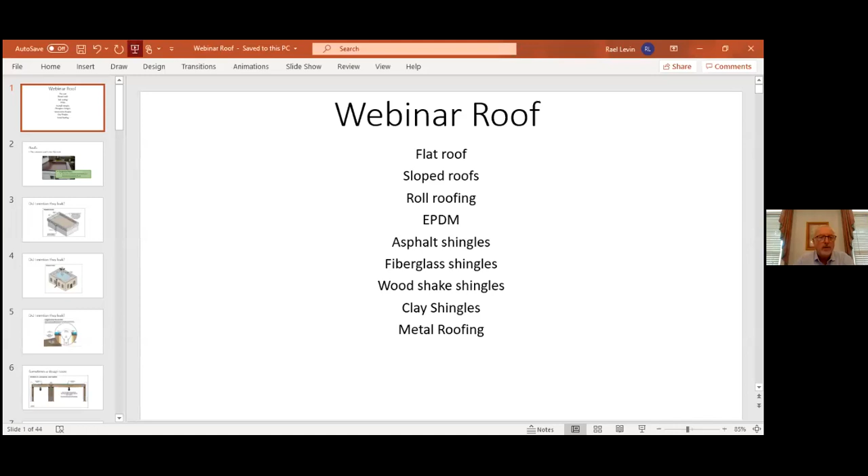Okay, let's share the screen and we'll start off right here. And we are ready to go. So we're going to deal with all the different types of roofs. We'll show photographs of them, the issues that come up with the different products we see on roofs, and we'll discuss actually physically getting on that roof and all those fun things.

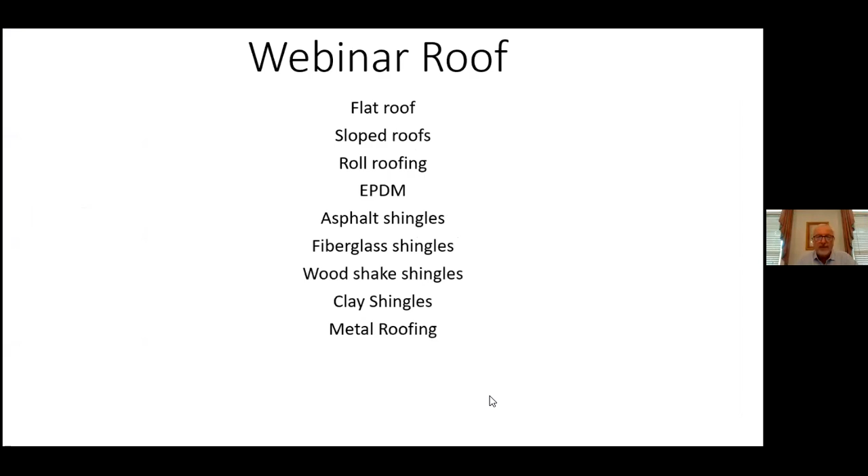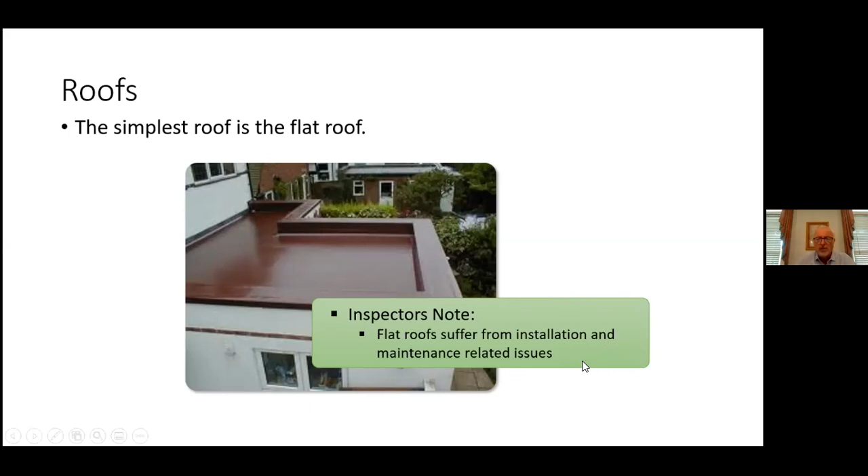Okay, so the simplest roof, of course, is the flat roof. If you see this particular slide, you'll see that we have a flat roof here, and the little built-up wall that goes around it is called a parapet. These are really common down in the Emory area, around Emory University and Grant Park area, but they all do suffer from installation and maintenance related issues.

So here we're looking at, okay, we have a flat roof. This one's got a gravel buildup on it. You can see over here in the bottom there's a downspout, which is actually a scupper. Basically the water would run off the roof down into these gutters here and away from the building. You can see there are others that are slightly above, about 2 inches above the membrane. Just in case something over here got obstructed, there would be a secondary exit point for any water that might be on that roof, so the water would be able to get out of there.

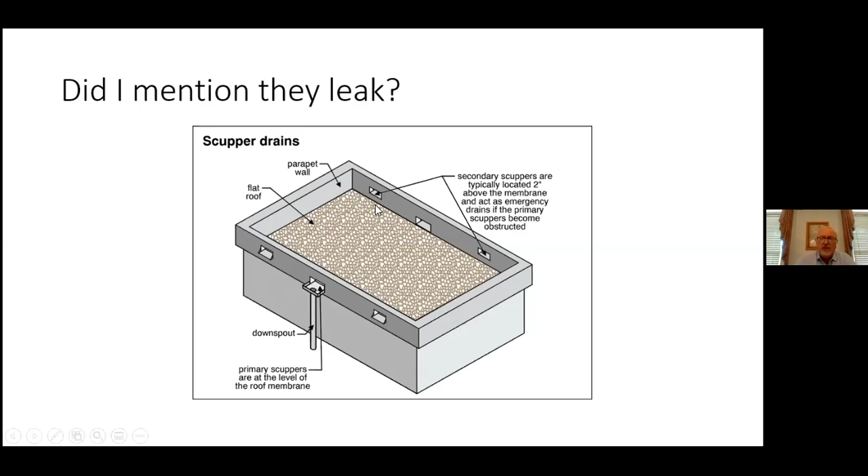And again, as with most things in life and most products, maintenance is a big issue. We're not going to run our motor vehicles without changing the oil or making sure the tires are in good shape. It's the same thing with our home, except we tend to think, well, it's big, it's there, we're coming home, we're busy, we got dinner to make, places to go, errands to run, and therefore the home kind of suffers from a lack of maintenance. Typically here on a flat roof, if you're anywhere near areas with a lot of trees, the leaves and debris that come off the trees would tend to land on this roof and clog up the gutters, and therefore you could have a situation where you'd have a leak.

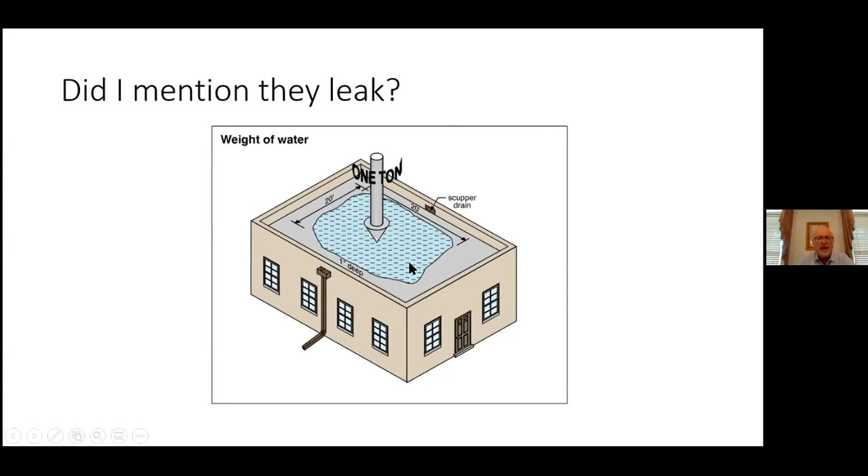So let's look at an example here. Say you're a 20-foot by 20-foot square building here, so that's 400 square feet. With 1 inch deep of water accumulated on there, we're actually looking at 1 ton of weight sitting on top of that building. The building structure, for the most part, over all the years has been wood, and with all this weight sitting on top of the home, when you have that weight sitting there, the wood would tend to give, and we would have a situation of some settling on the top of the roof.

So here we're looking at the clogged drain that has the debris, as you can see right here, and the water is ponding on each side. Because it's ponding, it's causing that weight to put extra stress on the structure.

If you've ever seen the older homes, there wasn't a requirement until maybe 15 or 20 years ago that said the maximum amount of roof shingle you can put on is 1 layer. We'll see a slide of that in a moment, but imagine the structure in the roof back in the old days was a 2x4, a 4-inch piece of lumber that went from the ridge of the home all the way to the outside wall. The actual rafters were placed approximately 2 feet apart.

On top of that, instead of the plywood or wafer board we use today, they had planks, maybe 6, 8, 10, or even 12 inches wide, and 3/4 inches thick. Those in themselves were pretty heavy for the sheathing. On top of that would come the asphalt shingle.

If somebody had a leak, they would just put a second roof on top of the first without taking the first roof off. That put even more weight on the structure, which caused the actual rafters to bow in and sag, and we could see that.

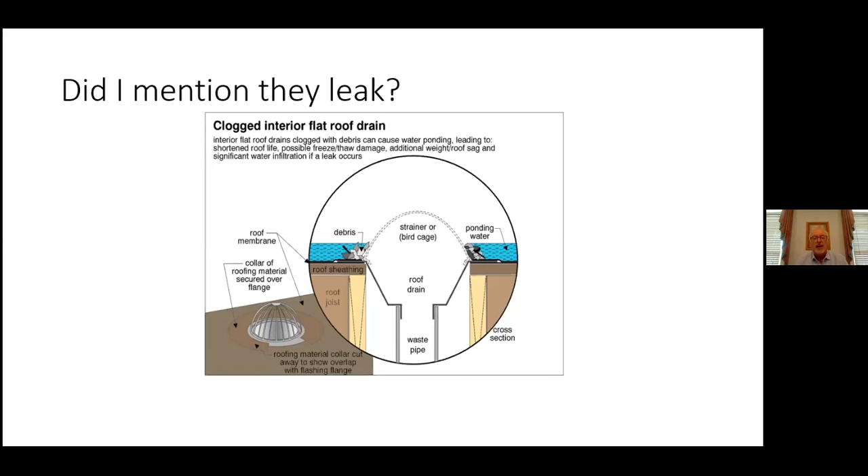So you can see right here how the water has been ponding and it's pushing down on the roof joists. As they sag, more water ponds, so it's an ongoing thing. As more water ponds, the roof joists keep sagging and sagging, so the water wouldn't even run over to the roof drain here anymore.

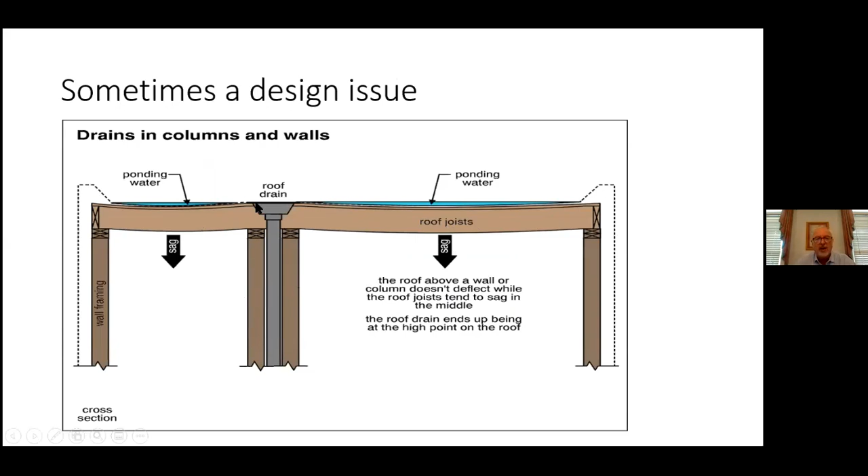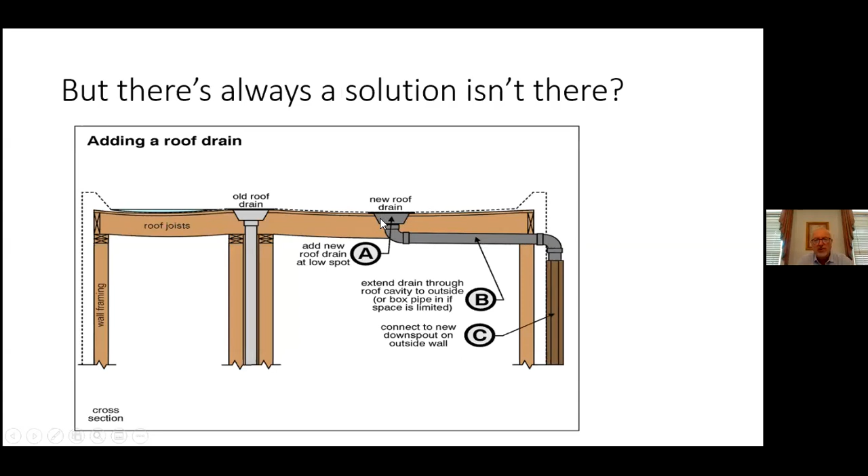So how would we handle this? Well, we would go ahead and put in a new roof drain, one on each side perhaps, and it would go down below here and out through the side wall and down to a new downspout on the exterior. That would be a fairly inexpensive way of dealing with the issue of that sagging rafter on a flat roof.

Okay, so the simplest roofs we see are shed roofs. As long as they've got a pretty good slope on them, we're okay putting just 3-tab shingles on them. If it's a lower slope, then we want to put in something like roll roofing or an EPDM, which we'll cover in a moment.

Usually it was not going to be made out of asphalt shingle, it would have been metal. It's a great show to watch, Building Off the Grid, so by all means check that out.

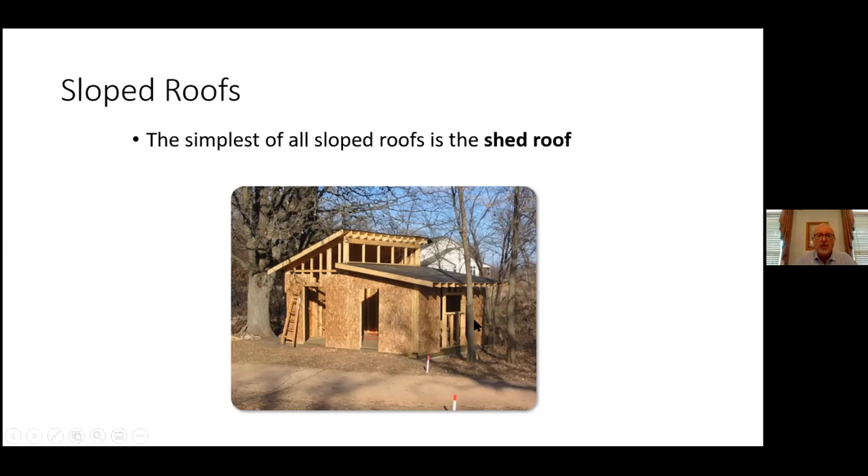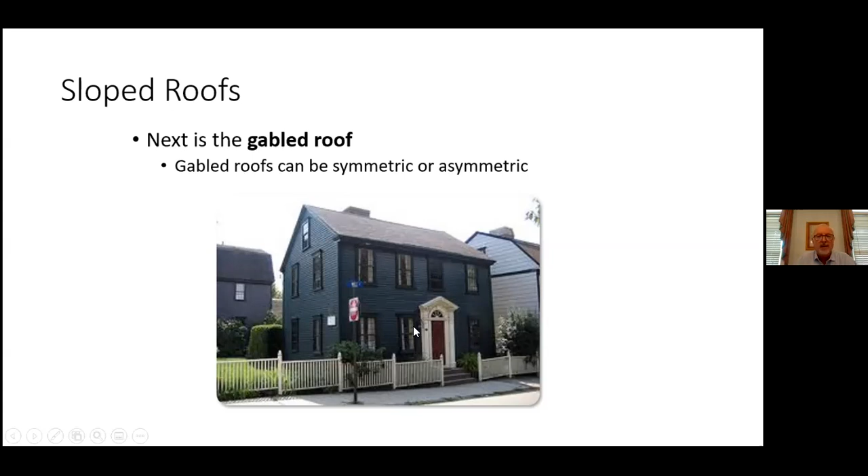So we're looking at the gabled roof, and they can be symmetric or asymmetric. This is just a typical gabled roof right here. It's really, really common that we see gabled roofs in our area.

The issue we would have with that is with water collecting around the base of the home, there would likely be some water intrusion to your crawl space or into your basement at some point.

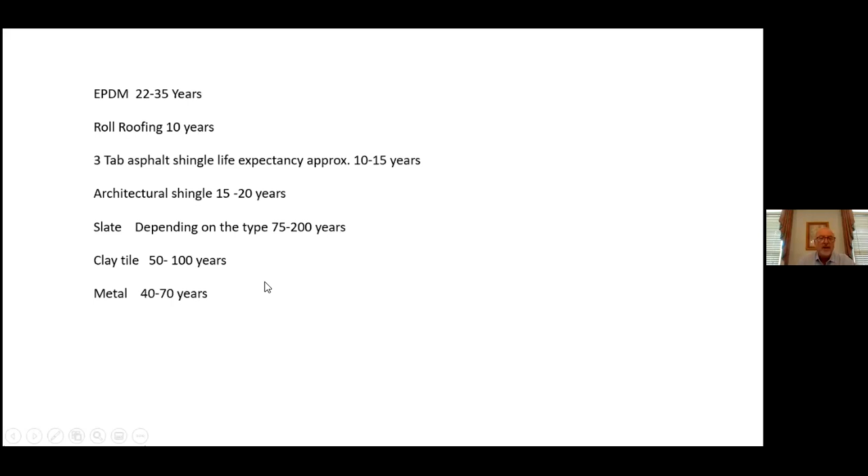So EPDM is actually a durable synthetic rubber roofing membrane. Here's what EPDM stands for: ethylene propylene diene terpolymer. So I prefer EPDM. It's used widely on low slope roofs around our area, really right throughout the United States. You can see it goes up the sides of this particular parapet. We're on top of a commercial building here, and that's the way it's done. It all again depends on installation.

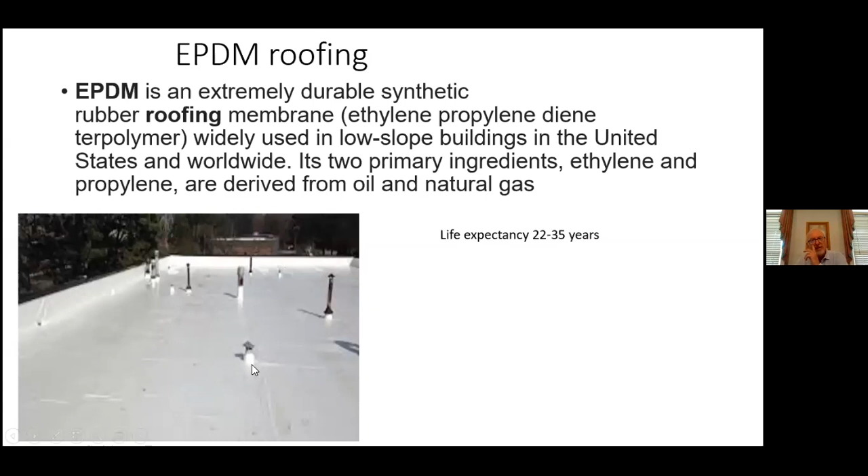We can also get into the modified bitumen roof. This is pretty much like what we would call roll roofing. You can see the seams may be mopped or torched, and they're overlapped about 3 inches approximately over the preceding layer laid out there. They're never installed in a straight line where the seam is; they always need to be staggered to prevent water from getting in. It's a very simple product for handy people to install, but if it's not installed right, it can be a major issue. The biggest thing about this installation is making sure the edges are properly sealed down. When they don't lay flat and correctly, there will be air bubbles, which would provide access for water to accumulate on top of the roof.

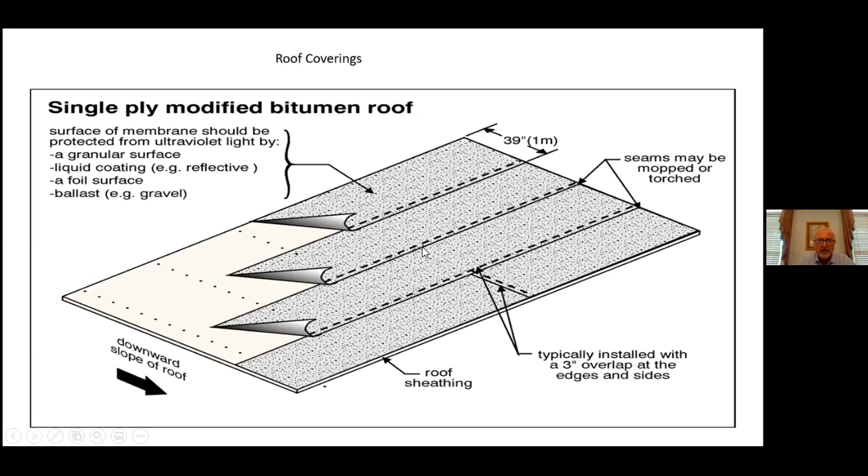So here we can see how it's laid out, it just rolls and rolls and rolls. You can come in and put down roofing adhesive and then roll down the roll roofing on top of it. Or the preferred method is to actually heat it up with a torch, and you can see how this all gets sticky. The asphalt right here would start to get heated up and sticky itself. It's rolled out and seals itself down, and that's the preferred method.

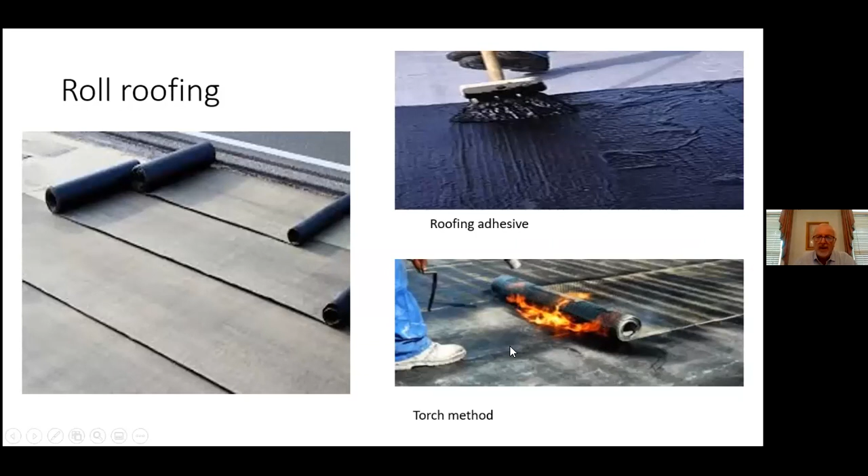Then we have the standard asphalt shingle. Here's the composition right there. It's got a self-sealing strip, a couple of inches wide, and then a granule surface. We've got the actual asphalt body or coating, and the fiberglass mat or organic felt at the very bottom. When you install these, you want to make sure these gaps are not immediately in line with each other; they always need to be offset. So the next shingle would have its opening strips right in the center here, and then it would overlap that far so the shingles could actually self-seal down.

So usually in the winter, it takes a while to get done, but the sun does warm it up enough so that it'll self-seal down. During the summertime, it's a lot easier and quicker for the shingles to actually seal themselves down.

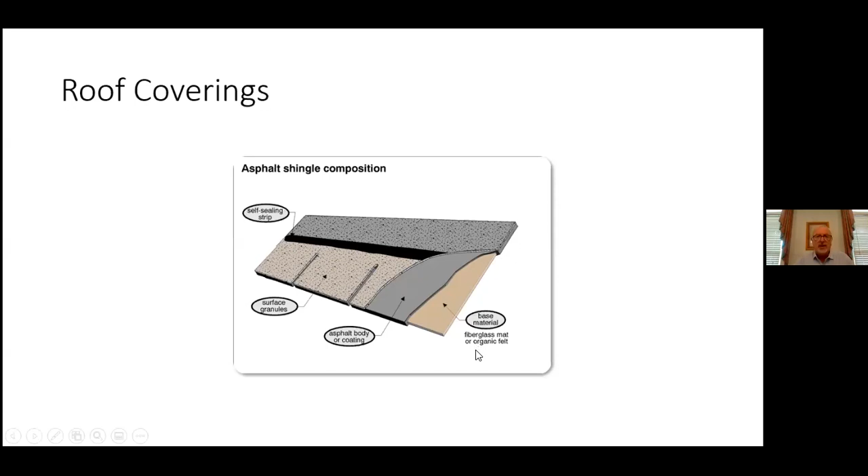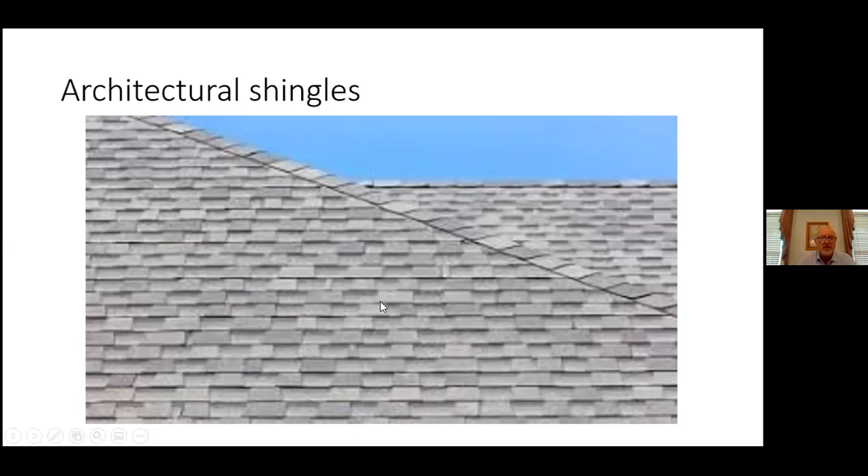So we look at an architectural shingle. For the most part, architectural shingle was a nicer look, and certainly would be on perhaps a more expensive home, but not always. In this particular case, I kind of like to see right over here, we have a ridge vent, which allows the heat to escape from the attic space out through the top, instead of all those wind vents and electrical power vents that Georgia Power would charge you to take the heat out of your attic.

It was just basically a defective product, and they kind of got ahead of the class action lawsuits that came against LP siding earlier on in construction, and also polybutylene piping was another one. These guys got out ahead of it and realized they had a poor product, and they jumped out ahead and said, well, okay, we'll go ahead and replace the shingles for you.

But what the small type says was, yeah, they will provide the material, not necessarily the labor. And as we all know, when it comes to most items that involve construction, the labor is the more expensive part of the process. So removal of all the shingles and hauling them away to the dump and the reapplication of the shingles was where all the money was.

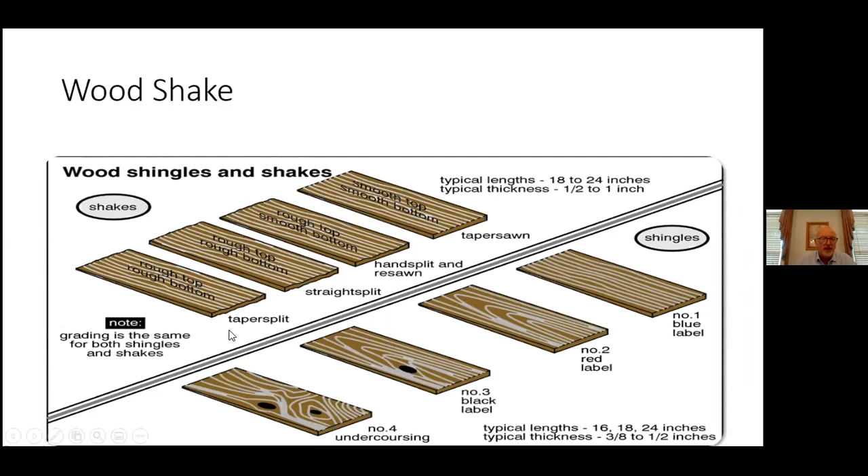Okay, so let's look at our wood shake shingles. Again, depending on the thickness, that would depend on their life expectancy. So we see here different types of actual wood shingles.

The issue here is that this is a product that you couldn't really walk on when you inspect a roof. They're brittle, and many times they've been on there for several years. It takes a special kind of construction in the attic, with the support of the rafters and the sheathing, in order to install these slate tile roofs.

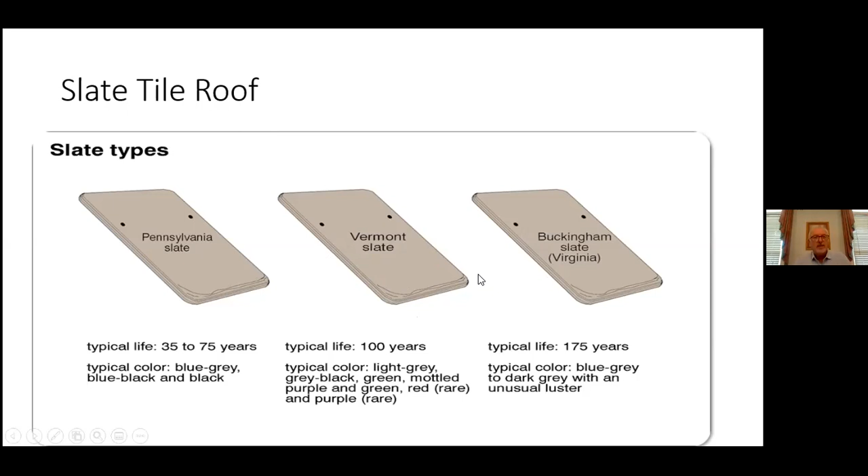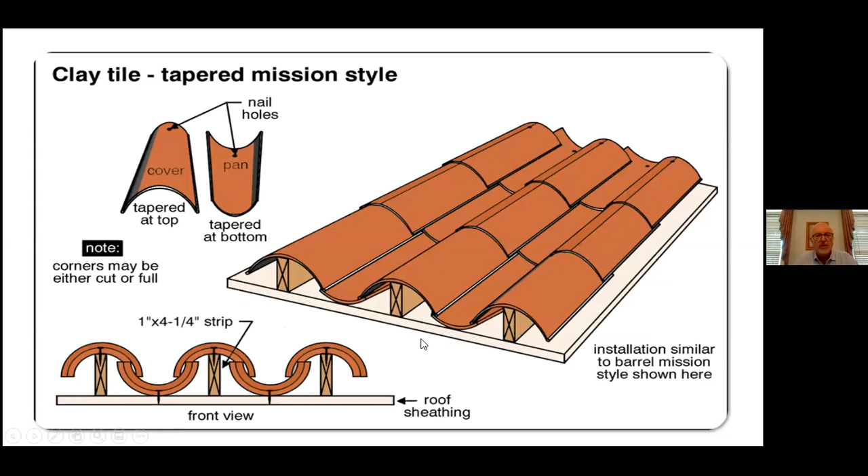And we also deal with the same thing of being brittle and cannot be walked on with clay tile. Wonderful product, looks terrific, but again, cannot be accessed without special scaffolding, which is beyond the scope of what we would do as home inspectors. We will do our inspections according to ASHI standards, which we'll cover in a moment.

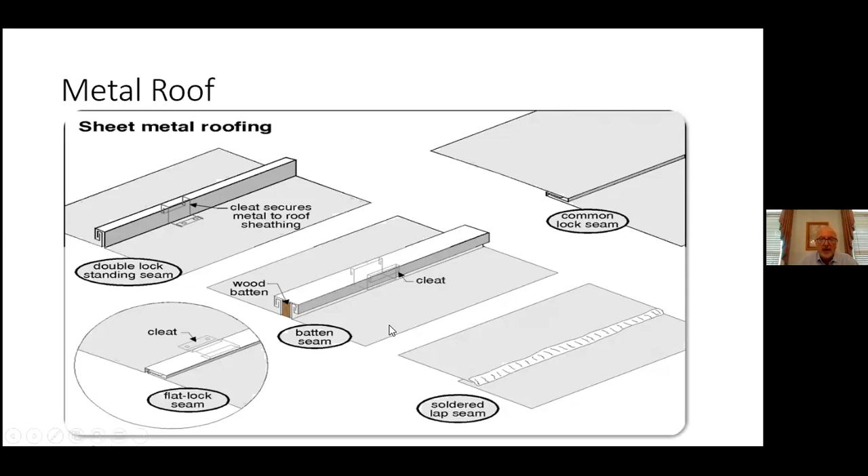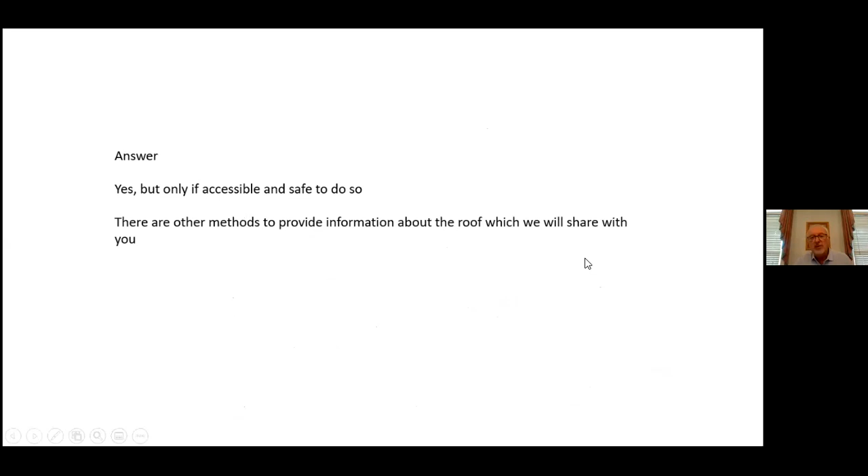So here we go. Do we actually get on the roof? Well, only if it's accessible and safe to do so. And there are other methods to provide information about the roof, which we'll share with you now. So would you walk on the wood shingle, slate, or clay roof? Most times not without special equipment, simply because it's too brittle or slippery.

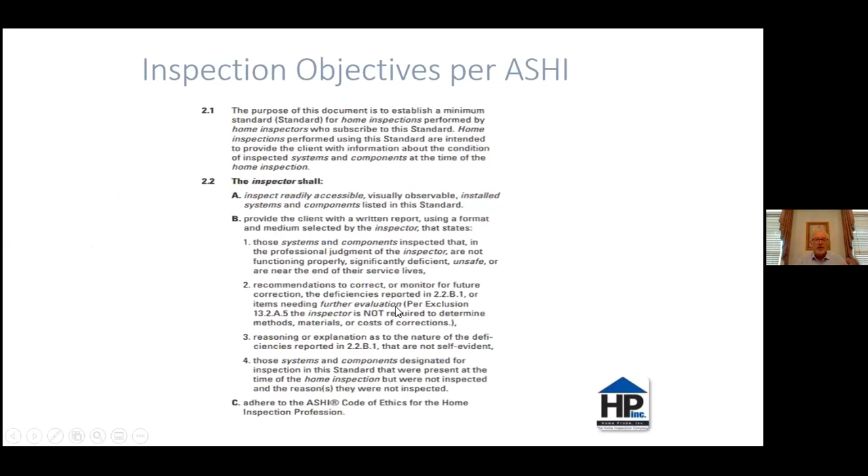So we do our inspections to the American Society of Home Inspector Standards. And here we are having a look at what we are supposed to do. You can see the inspector shall inspect readily accessible, visually observable, installed systems and components listed in the standards. And then we'll provide the written report and describe how we inspected it and things like that.

So if the roof was not able to be accessed safely, there would be a limitation comment in there. The limitation would say the roof is too steep to safely access. Doing so may also cause damage to roofing materials without specialized equipment. The roof covering can be evaluated as a whole, and leaks would be evident from the interior space, and this area is scrutinized when the roof is not accessible. So that's the limitation that we would have there.

We've actually been able to go about a different method as well, which we'll cover in just a moment. So here we would describe how we looked at the roof with binoculars from the ground and from the roof edge if our ladder was able to reach up to that height.

So here we are. We're not required to be there, but here we have our Home Probe inspector. He's on that roof. We climbed up on the side here where this little structure was and were able to get up to here, and then perhaps slide ourselves up to the top of this one right here. So when we can, we will, but it's actually not required through the standards.

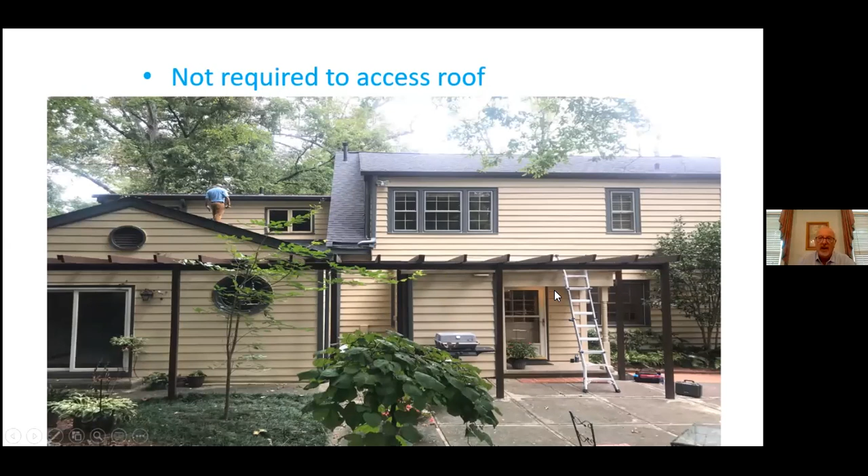So how would we look at the roof and tell you about our issues if we weren't able to walk it? We'd go inside the attic, and we would see where there had been a leak. This was in a home that had a disclosure that said there were no roof leaks, but they obviously had known about it. They had actually put up a little catchment pan here in the attic to catch the water.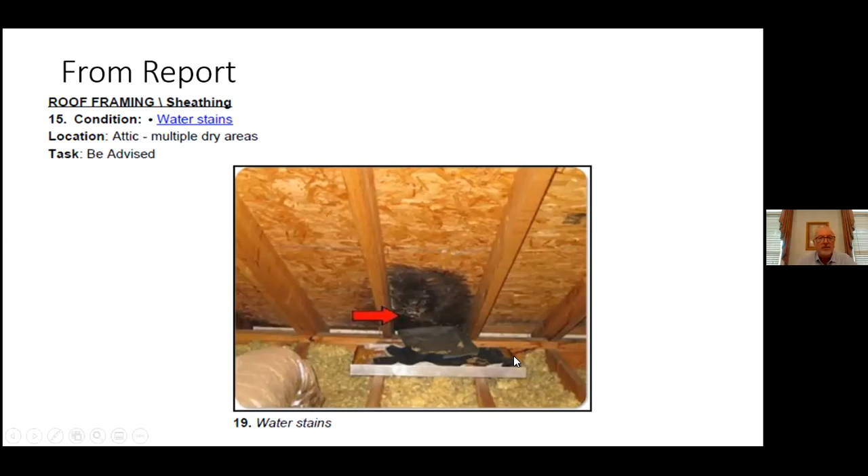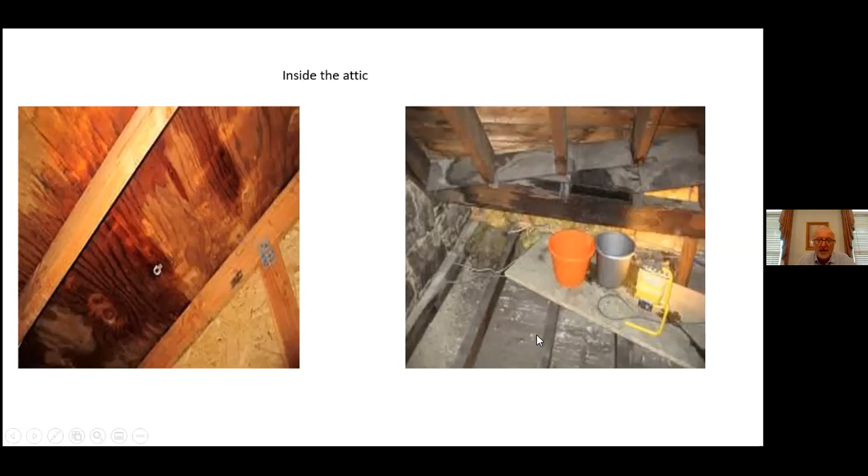So perhaps it wasn't exactly a truthful disclosure. Best to say you didn't know. Inside the attic, again, you can see here the darkened spots where it's wet, and they even had a couple of buckets right here to catch that water on this particular roof. We would see water stains inside from roof leaks.

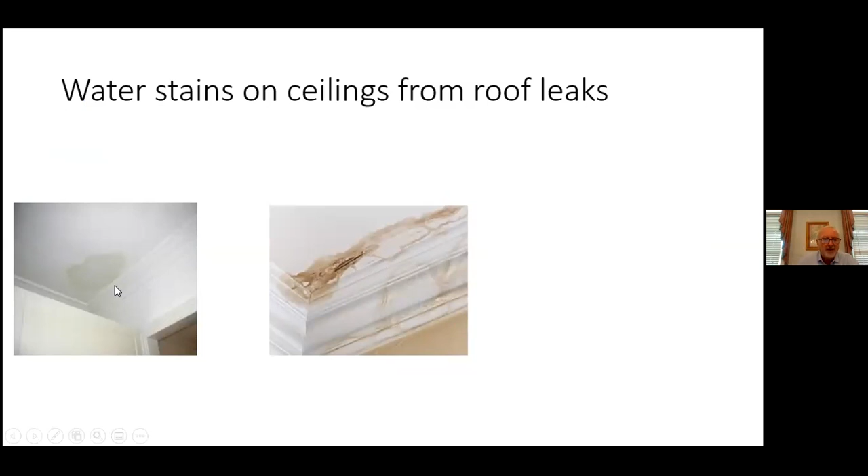By the way, there are different types of testing machines that we have now that can actually tell if the roof leak is still active, and we can put that into the report.

So here we are, we have drones. Every home inspector with Home Probe has their own drone, and this is the way that we will always be able to guarantee you an image from above the roof. These help out tremendously on these really steep roofs, or the roofs that have the type of materials we can't walk on. It's kind of a fun thing at Home Probe.

Everybody was actually able to name their drone. I happened to choose Ethan, because I figured if it was mission impossible for me to get on the roof, I could send good old Ethan up there and we would be able to take pictures as needed. So this is where we would be able to tell the shingle had lost its granules and therefore was at the end, or very close to the end, of its life expectancy. And then perhaps there would be a renegotiation with the budget on how to approach that particular issue.

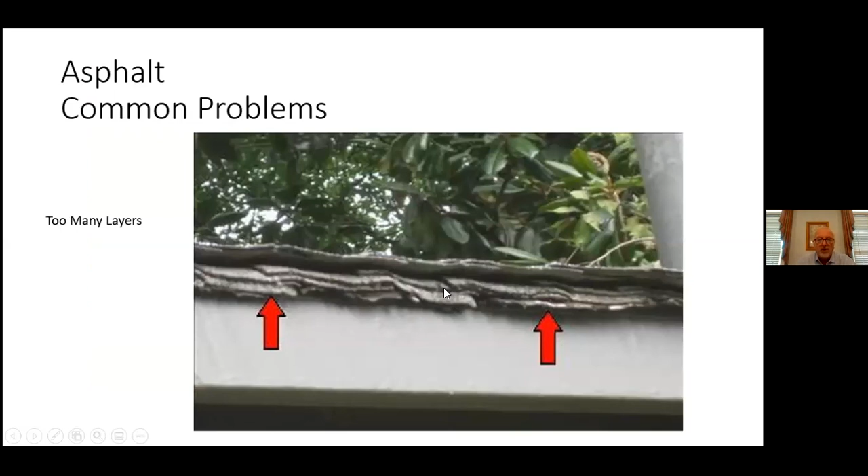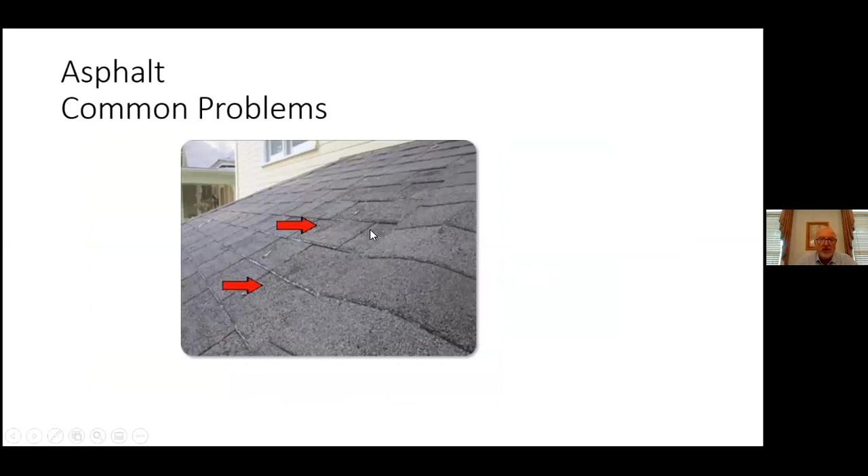Multiple layers - this is what we spoke about in the beginning, about the weight on the roof which causes the sagging. Some patching went on there. We could see on this particular picture these little white streaks and the discoloration. We've lost the granules on this roof, so that's another common problem.

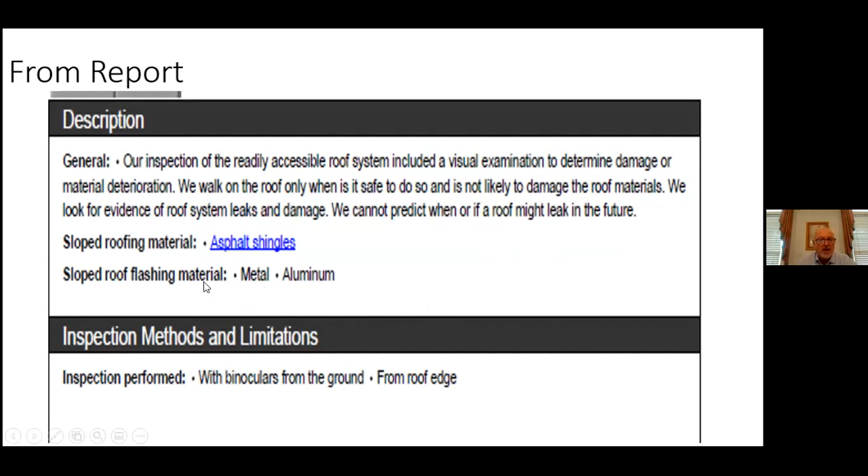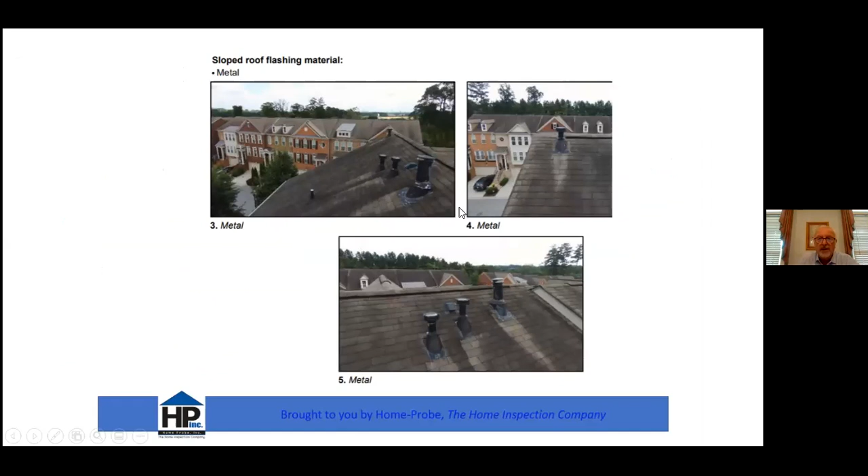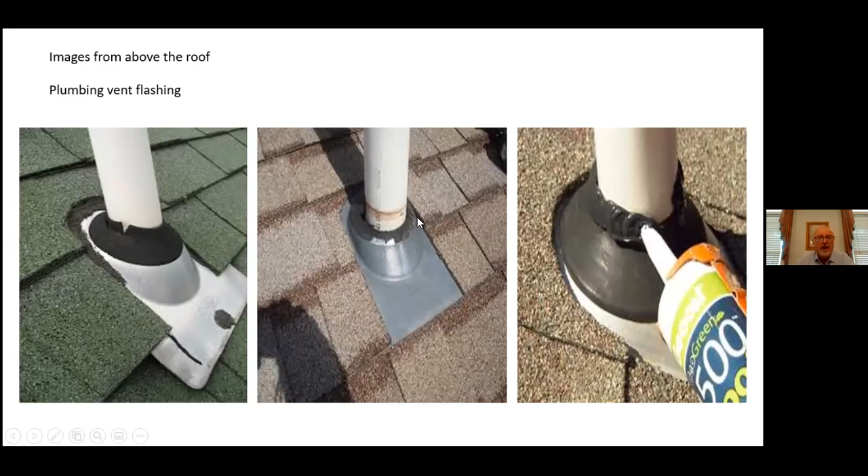So it's great that we can get up there with our drone and have a look at these. A simple fix, of course, is to apply some asphalt caulking at the top, which is a simple way of doing a repair. Recommended would probably be replacement by a qualified contractor to get up there and replace that particular flashing unit.

So beware of the drone hackers. I can share a little story with you quickly before we end off. I was doing a condominium over in the Buckhead area, and I was taking a picture of the top of this very tall building, and my drone just took off, and I could do nothing to stop it. Across the street was a school, and I could see the drone heading off toward the woods behind the school.

I figured I was going to go back and pick up what was left of my drone. They assigned a person to me, and we went to the back of the school. It was nowhere to be seen, but I rebooted my phone, which is how I operated the drone, and noticed the camera was still working. So I pushed the button to raise it off the surface, and sure enough, the drone had landed on the roof of the school. I brought it back to me, and it was in perfect shape.

We walked back through the hallways of the school, and I passed by a classroom full of young kids who were all snickering and smiling when they saw me walking by with my drone. So these little people had hacked my drone and shot it over the top of the school.